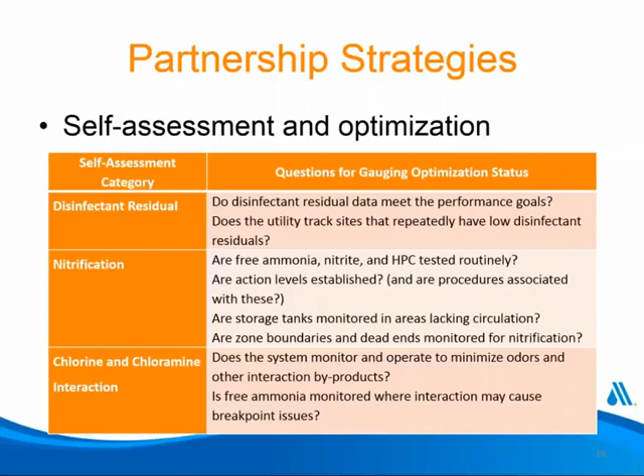Andy? Thank you, Barb. So let's back up a little bit and talk about the chloramine chemistry itself. As Barb mentioned, chloramines are the chemical species formed by the reaction of ammonia with chlorine, and they've been used successfully for decades as water disinfectants.

Again, as Barb mentioned, primarily for two reasons. One is that there's a low propensity for these chloramines to create disinfection byproducts, or DBPs, because as an oxidant they're much less aggressive than free chlorine. Secondly, they have persistence or longevity—they just last longer in distribution systems. So those are the real reasons chloramines have been used for so long and so effectively.

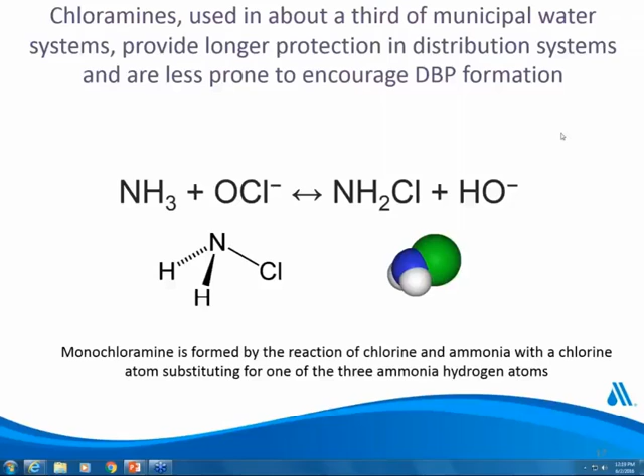Most importantly, if you look at the first equation where we form monochloramine by reacting ammonia with hypochlorous acid or chlorine, you can see that the reversible nature of that reaction means monochloramine can actually decay. It's called monochloramine decay, the phenomenon where the monochloramine, through a hydrolysis reaction, can create ammonia back in the system again. This is one reason why perfectly good chloraminated water can leave a water wholesaler treatment system and arrive at a customer tank or reservoir with some level of ammonia already in it. It's not necessarily that the water was bad, it's just the nature of the reversible chemical equation.

So if we go to the next slide, we can see that chloramines are effective and persistent as a disinfectant, but the reversible nature of that chloramine creation can create problems, and certainly, as Barb mentioned, one of the major issues is nitrification. This is something the EPA has examined—an EPA-cited study found that 63% of chloramine-utilizing utilities had some degree of nitrification in their systems.

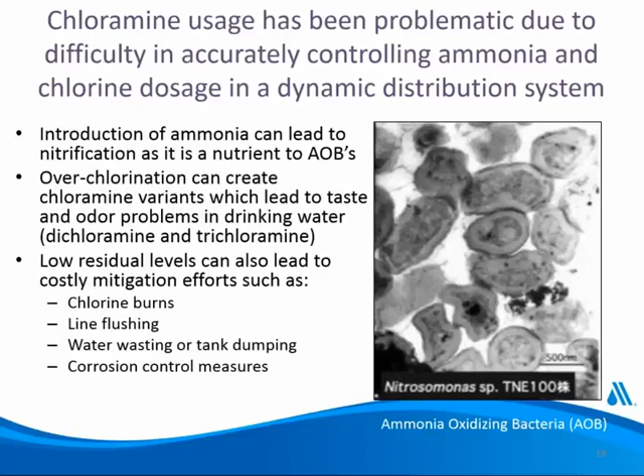So if we look at the chloramine breakpoint curve, the essence or the most important factor in controlling chloramine residuals in a distribution system, in a reservoir tank system, or the distribution system as a whole, is understanding where the residual is on that chloramine breakpoint curve.

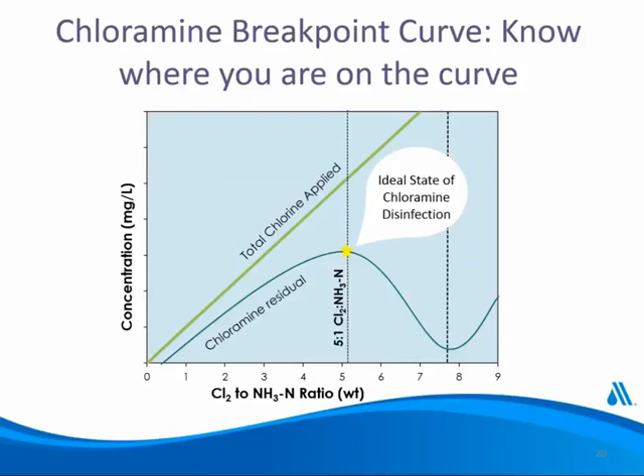Understanding where you are on the breakpoint curve is critical, and there are four criteria important to control your chloramine once you know where you are on that curve. First, you have to accurately dose the reagents, ammonia and chlorine, or sometimes just chlorine, and control the ratio very accurately between the two reactants.

Secondly, the tank has to be completely mixed to eliminate any chemical stratification and ensure the analytical readings of residual reflect the condition of the entire tank, versus pockets of unreacted or improperly reacted chemicals. If a tank isn't completely mixed or in equilibrium, you'll have pockets of residual or unreacted chemicals that can improperly indicate a condition not representative of the entire tank.

The third issue is you need a method of introducing the two chemicals, chlorine and ammonia, in a very aggressive manner so the ammonia introduced is consumed by the kinetic collision of chlorine in the tank. It doesn't help to introduce ammonia in one area of the tank and chlorine in another without the two molecules meeting. You want that introduction to be very aggressive and high-energy kinetically.

So that you can actually form monochloramine immediately. And finally, you have to have control logic and instrumentation that will allow you to react very quickly to changing dynamics as that tank sees new water or is cycled through its normal fill cycle. Next slide, please.

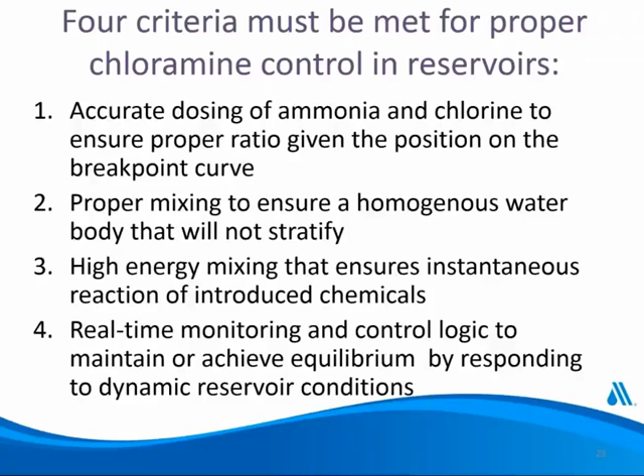So this is our MonoClor system. We've got about 50 chloramine management sites in operation, with an equal amount in design right now. It very simply and elegantly manages the chloramine residual levels in tanks and reservoirs.

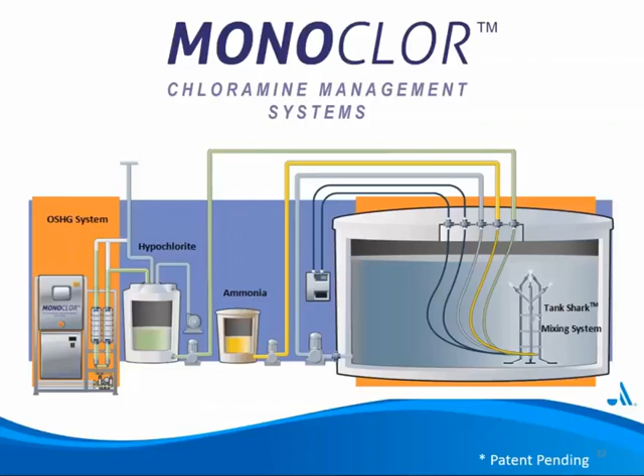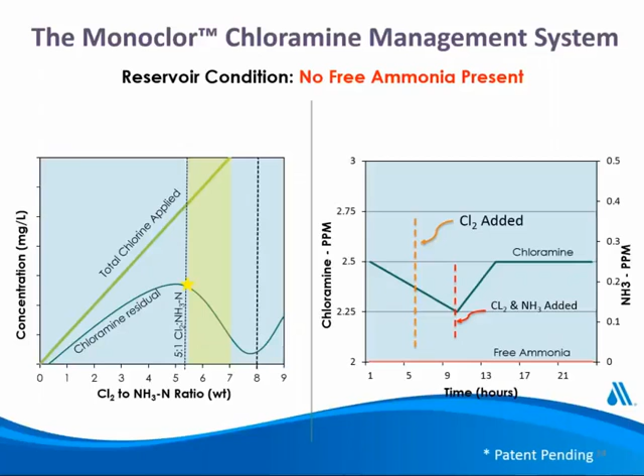What I'm going to have Brent Simmons do now is explain how the system is constructed and how it's actually implemented, with two very quick examples of how it works, and then we'll move into the utility case studies. Brent? Next slide, please.

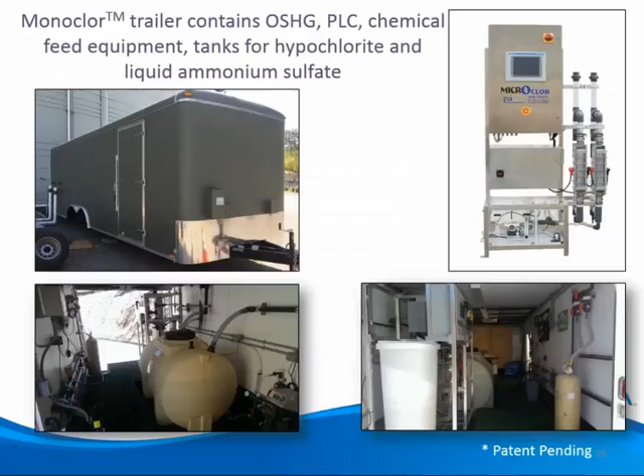Bottom right is the side view of the chlorine generation system, supply of salt. To the right, a DI bottle, because we don't have a disposal mechanism for a softening system in the field. The trailer is fitted out with hypochlorite storage tanks, double containment, metering pumps, analyzers, and a bit of lab space. It's a fully contained, fully functional pilot which can be deployed and put into operation in about 2 days. We have these running around the country right now, with some very successful results you'll see in the following case studies.

Just as a comment, if any of you have worked with aqueous ammonia feedstocks, you can imagine the nightmare it would have been in summertime, 100 degrees, trying to maintain that liquid, whereas the liquid ammonium sulfate is completely stable, zero volatilization, and much friendlier from an operator perspective. So a very successful deployment at San Jose Water.

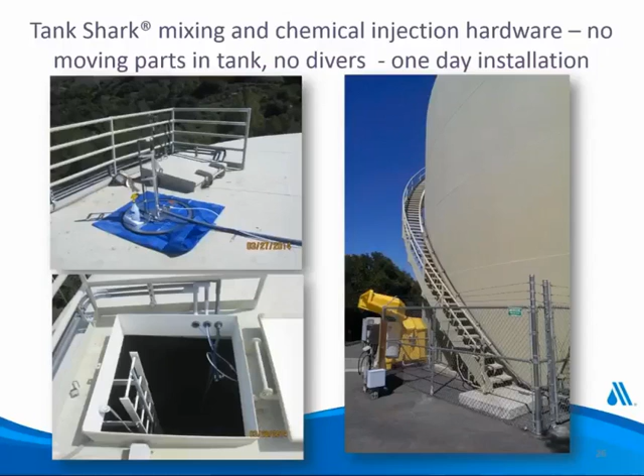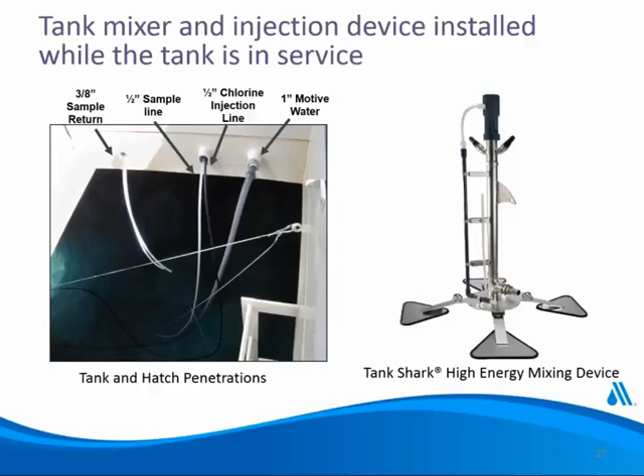This is the actual 1 million gallon tank that we deployed the tank shark at San Jose. It's approximately a 40-foot tall tank, and you're looking at the liquid level about 10 feet down from the hatch. So you see the amount and the high energy mixing of that water. So you're seeing the effect from the Tank Shark 30 feet below.

A very important part of the whole Monoclor deployment is the amount of applied mixing energy. This is showing good mixing, but for every product, we look at the reservoir geometry, volume, and dwell time to determine the energy needed. Our smallest mixer, the Tank Shark, is around 1,000 watts of applied mixing energy, while our largest systems go up to 15,000 watts. It's very important, as Andy mentioned, that you have the proper amount of energy applied to be successful in the Monoclor approach.

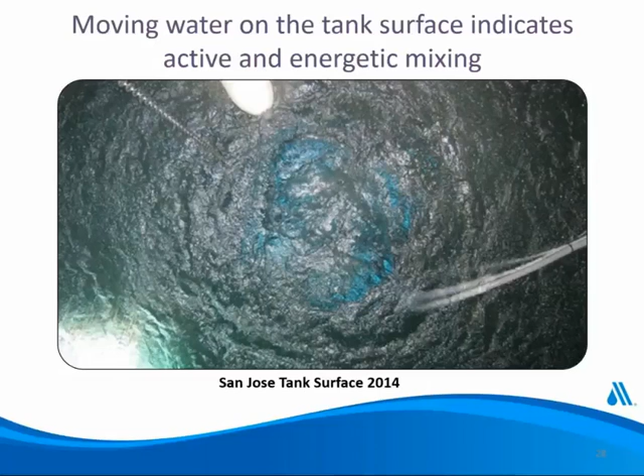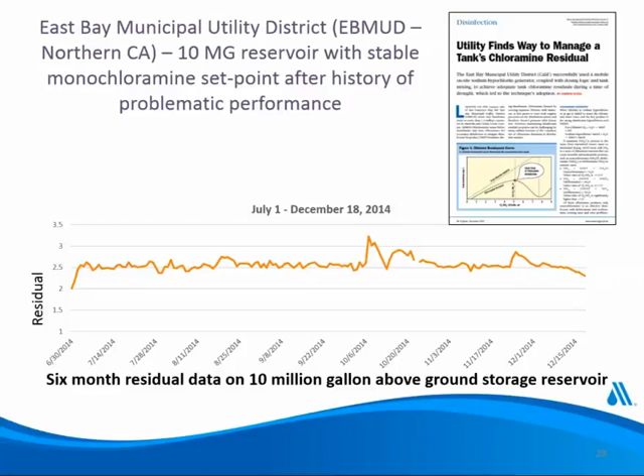Some data from EBMUD in Northern California, also detailed in an OpFlow article. This is 6 months worth of data from a 10 million gallon reservoir with constant issues with low residual. We deployed the Monoclor process, and over the course of 6 months, aside from a couple spikes relating to analyzer calibration, we basically solved the problem by implementing the 4 major aspects of Monoclor. This is one of our largest mixers due to the volume of the reservoir.

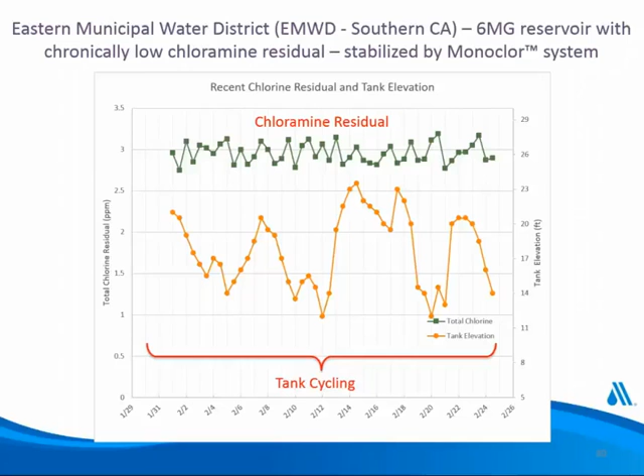This is my last slide. We're going to hand it over to Francois from San Jose Water.

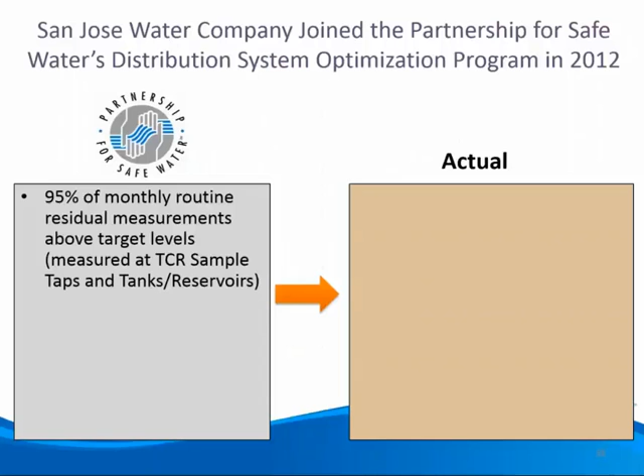Thank you, Brent. This is Francois with San Jose Water Company. I'll give you a little background before covering the details of this slide. San Jose Water Company is celebrating its 150th anniversary this year, which is good for the West—I'm sure some Eastern utilities think it's a young utility. We serve a population of about 1 million customers in the South Bay of San Francisco. We have about 2,400 miles of pipe, 25 well fields, 2 water treatment plants, and we import surface treated water from the Santa Clara Valley Water District from 14 different turnouts.

We have 26 basins, typically earth embankment type reservoirs, and 71 distribution system tanks. We monitor our samples for TCR and for disinfection byproducts at 140 distribution system sample taps. Generally speaking, our water is 50% chloraminated—that's the water we purchase from the Santa Clara Valley Water District—and the other 50% comes from groundwater and water we treat at our own treatment plant.

So that sounds like this 50-50 mix is a recipe for disaster when it comes to nitrification, and that would be definitely correct. However, I should say that we typically segregate those sources of water in different pressure zones, and we operate our system to minimize mixing of those two different waters. We also have plans to alleviate this issue by converting our larger water treatment plant to chloramine early next year, and the major groundwater station also to chloramine, where they typically mix or pump water to chloraminated zones.

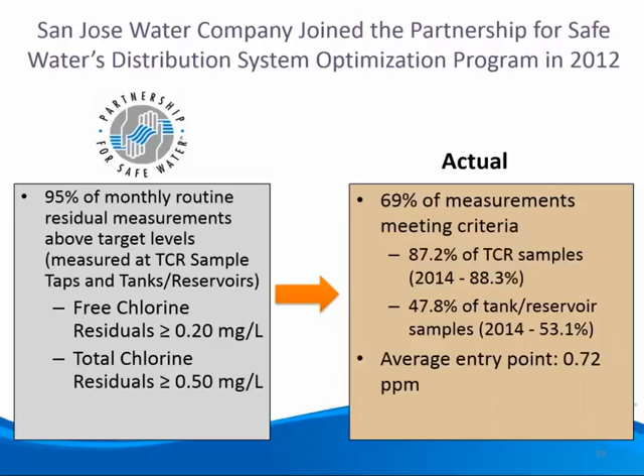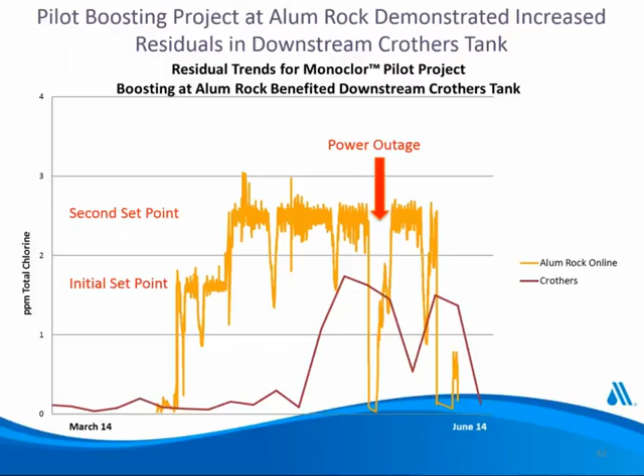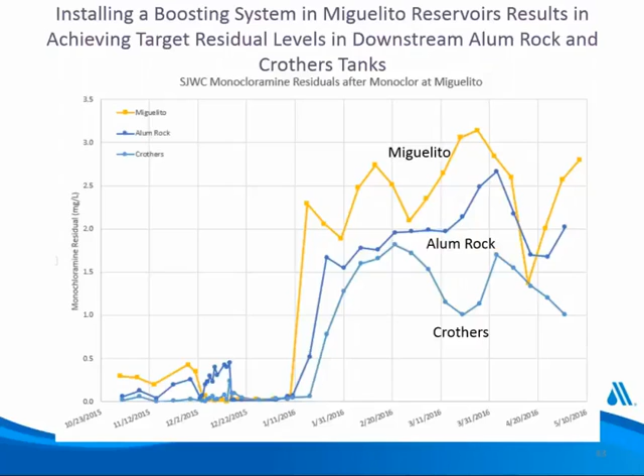So now we're at the point where the system is very stable, and both basins at Miguelito and the two downstream tanks are doing very well. I think we consider this a success. We will be looking at further investments in our distribution system with the goal of getting all of our tanks and residuals throughout the system to meet the partnership criteria, and possibly better than that. We have planned capital improvements.

The partnership again helped us understand issues. We've taken care of all the low-hanging fruit, taken tanks out of service, and so forth. We've discovered that some of our tanks in a zone, if one is hydraulically lower, depending on demand, one of them doesn't really turn over. So we are installing SCADA control valves so we can separate, essentially split the zone during times of low demand, and those tanks can work independently from each other.

We are installing additional residual boosting systems at key locations, and we are conducting a study throughout our system, testing every tank and building chlorine decay curves, so we can understand where we need to boost and minimize the number of boosting stations, while making sure all of our tanks have appropriate residuals. We also worked with UGSI to develop a water quality station or cabinet.

That will be installed in 10 of our tanks this year. The cabinets are essentially interfaced with a mixing system and provide a chlorine residual that is relayed to our SCADA system, but more importantly, they provide operators with the ability to introduce chlorine and/or ammonia to the tanks or reservoir in a very easy fashion.

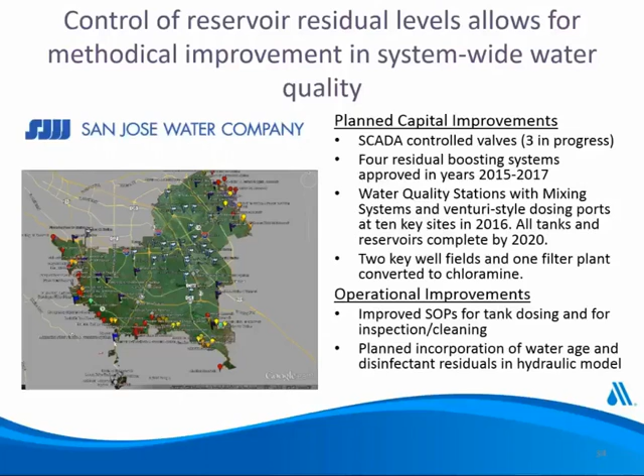A little background on Aqua Pennsylvania: we serve in the area of 950,000 customers in southeastern Pennsylvania through over 5,000 miles of pipe. We have 7 different surface water treatment plants, 70 remote well stations, and upwards of 40 different tank locations with varying storage capacities.

Hillside Tank is one of the few 10 to 12 million gallon tanks that we have. So it's a very large tank, and like I said before, it's a critical tank in this area. It affects all the tanks in the surrounding area.

Each summer, if you operate a system you've heard this before, whenever it starts to get warmer, or if it's already warm when it gets hotter, we start to see the residual decline in this tank consistently anywhere between June, July through the end of September, beginning of October. This past September in 2015, we saw a severely challenged residual at Hillside Tank. We had a detectable residual, but it was very low. We decided to deploy the Monoclor pilot trailer in order to see if we could mitigate that issue.

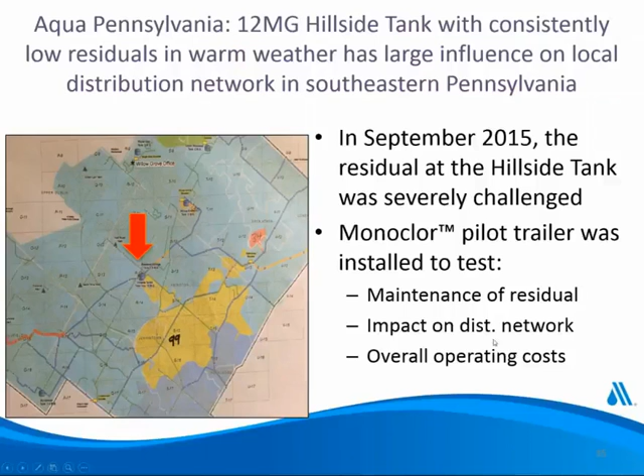Next slide, please. We ran the pilot for approximately 2 months. We installed it in the first week of September. It was not an easy process because of the height of this tank - this is a 120-foot tank. The operational level is between 80 and 100 feet inside the tank.

After running the system for about a week, we did not see any significant change in the residual inside the tank, basically because we already had a demand event inside the tank. The tank was already essentially gone, as we'd like to call it, or severely challenged with its residual.

So the decision was made to breakpoint the tank. It's an interesting point to note that we were actually able to utilize the Monoclor pilot trailer equipment in order to more effectively chlorinate the tank than traditional methods - either injecting into the fill line into the tank, or as Francois had mentioned, climbing the tank and dumping a carboy in, and so forth. We were able to utilize the Monoclor trailer equipment in order to safely and effectively breakpoint a 12 million gallon storage tank relatively quickly.

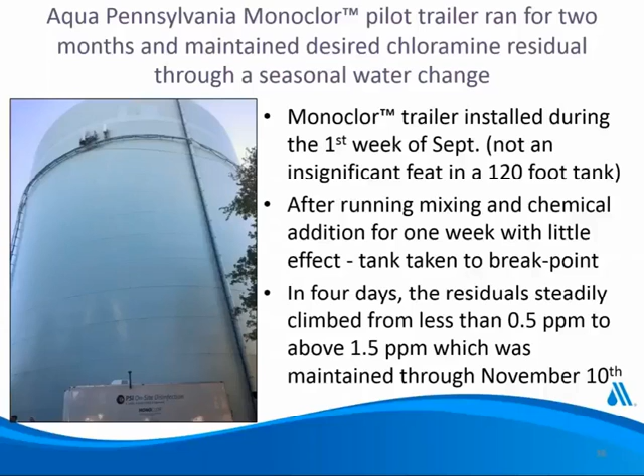Now, at Hillside Tank, because of its positioning within the division, it is a centrally located tank, so you do see significant flow rates into and out of this tank based on the fill-draw cycle. Interestingly, this tank has a different fill and draw cycle than most - at least in our area, typically most of our tanks fill during the nighttime when there's low demand, and draw down during the day. It was actually reversed for this tank, where it would fill during the day and draw down during the night.

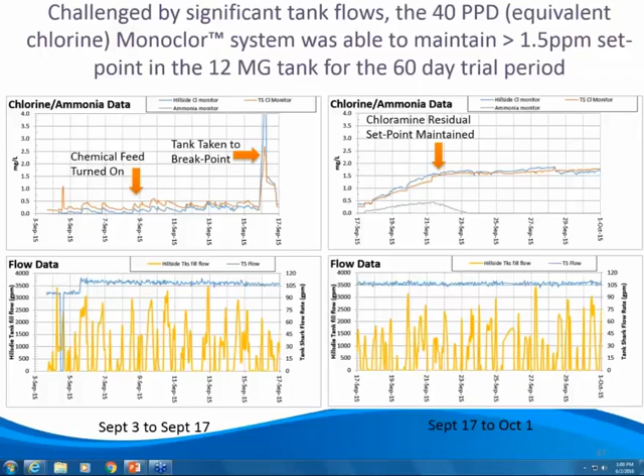So these are some of the lessons learned after the pilot. This was a challenging tank to address because of the size and the effect it would have on the surrounding area, as well as the number and difference in makeup of the sources of water for the tank. The pilot was a 40-pound per day system. In hindsight, which is always 20/20, we probably could have used a larger size, but with the size that was provided on site, we were able to accomplish a lot with this tank.

We did see a positive effect on 4 surrounding tanks in that division, where before we were having issues with the residual being very low at Hillside, we would see a negative effect where the residuals would decline and or bottom out, which would require us to chlorinate the tank. After the residual was maintained at Hillside at 1.5, we did see upswings in the consistent residual at other tanks in the area, 4 other tanks totaling about 9 million gallons of additional storage.

The water quality in the distribution system also increased with the residual increasing in a consistent manner, and we were able to see that through our total coliform rule sampling and distribution sampling in the area.

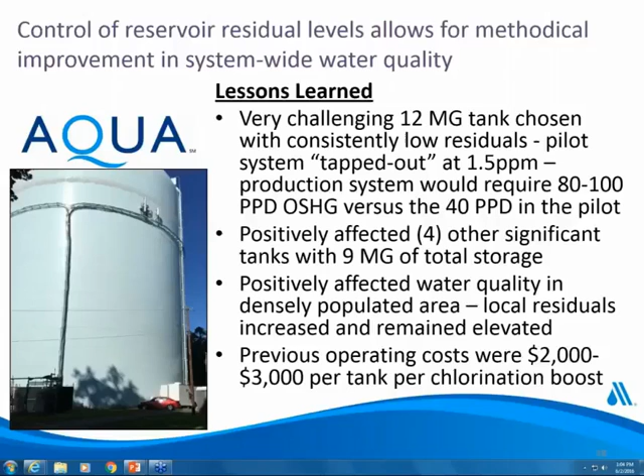So at this point, I'll hand it back off to Andy. All right, thank you, Tom. Next slide, please.

To recap, while the chloramine chemistry is certainly complex, the management of chloramine residuals doesn't really have to be that complicated. If you take care of adding enough mixing and motive energy to get a tank homogeneous from a chemistry standpoint, it becomes easier. Certainly having an energetic mixing zone where you can have that kinetic collision of the reactants, ammonia and chlorine, and create chloramines at will, that is helpful and a requirement.

If you can install real-time sampling to accurately assess the actual chemistry within that homogeneous tank, very, very critical. And then an algorithm which allows you to assess where you are and add the right ratio of reactants at the right time to maintain that reservoir. Those are really the four critical items.

And the benefit, obviously, is that your operational staff will have time to increasingly add value in other areas because your residual will be maintained. There'll probably be less cycling of those tanks, and essentially you'll be able to utilize your capital more fully in terms of your capital in your reservoir and tank system.

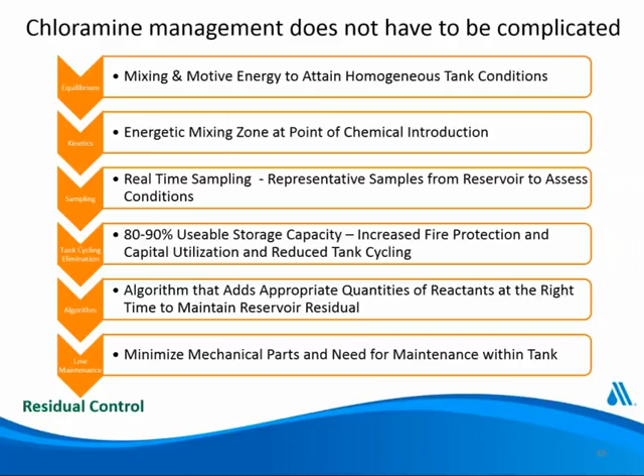And then finally, this all gets done with our Monoclor system. It gets done without the need of having mechanical parts or mechanical movement inside of the tank or reservoir itself, which makes maintenance and long-term performance much more easily attained. Next slide, please.